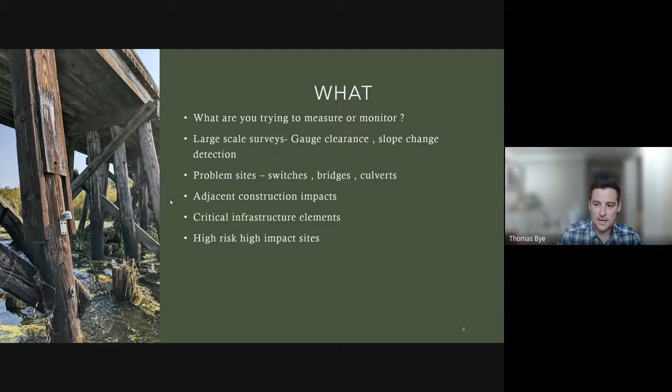As we talked about before, at your larger scale, we tend to find you collect data in stages. Large scale gauge clearance, LiDAR scans of entire routes, slope change detection. So that would be flying a slope alongside a railway, an embankment, a retaining wall. You fly that maybe once a year, once a quarter, monthly, depending on your risk and your movement levels. And then you start to narrow down where your problem really is. As a business, we would obviously love if everyone sensored every bridge, every culvert, every structure. Not going to happen. We know that's not going to happen. So we look at collecting data across, say, a kilometer, 2 kilometers, saying, hey, your problem areas are here, here, and here. Maybe we should go and sensor those locations if they're particularly high risk.

Typically, we find the biggest headaches for operations revolve around switches, automatic switches that go into fault mode, or won't throw automatically from the control center. Typically, that's associated, we find, with that dynamic voiding. They start voiding and need tamping or need ballast packing. That voiding gets worse. Then as the voiding happens, the geometry changes, the switch blade can't close properly, then you get a switch in fault. You have to send someone out. By monitoring the switches, we're able to start to inform, hey, these are starting to void more than the others. Maybe that needs attention first, and build up that asset management plan.

Bridges, as you can see, I appreciate a lot of the audience here is in the LRT, light transit area, where hopefully a lot of your bridges don't look like that one on the left.

But for the Class Ones and the freight railways, they have a lot of legacy structures, a lot of legacy culverts that I think, if people were honest, could probably do with quite a lot of maintenance, but being able to keep an eye on them, to see what's moving, to see what's failing before it really fails is key.

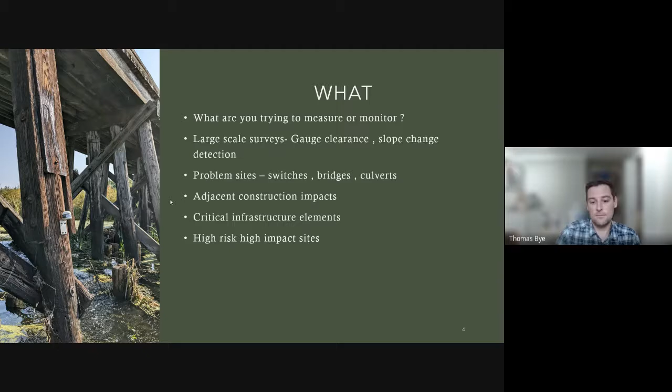And as we touched on before, adjacent construction impacts. If you've got someone doing, say, line side piling or line side retaining walls, you're most worried about cross level and twist. That's ultimately what would put your train off the track. If you're going underneath, you're maybe worried about settlement or consolidation of the ballast, or voids opening up underneath. So yeah, that's kind of what we typically measure.

How? Again, we like to think that we can replace or supplement a lot of the skilled human eye, but ultimately for that final decision on the rail, you can't beat someone going out and doing that final inspection to make that judgment call on what the data is telling us and how this is going to affect the safety of our operations. So there's still definitely a place for the skilled human eye, but they can't be everywhere all the time.

And as the title says, our slogan is keeping boots off the ballast. It's fundamentally safer to not be on track than it is to be on track. I know there are various ways we can put protection in, we can put closed lines in, we can turn all the power off. But if you're not there, you can't get hit by the train, you can't trip over the rail, you can't have an accident on the site. So by installing sensors on the track, these provide that real-time data as if someone was there to help inform where to target and where to view.

Particularly relevant for track geometry faults, cross-level, twist, where you would typically have to go out either with your survey bar or a track trolley, or maybe set up a total station to do the monitoring. This is on track for maybe an hour to do the setup. It's then calibrated and set up, and it just pushes the data out every 10 minutes, every 15 minutes, every 5 minutes, whatever the client needs, without that human being in the danger zone.

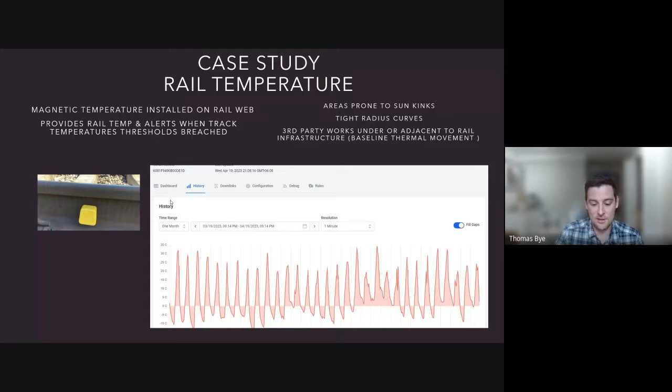And we obviously work with clients on whether it's ballasted track, your sleeper spacing, your tie spacing, direct fixation track, transitions between slab track and ballasted track, and how they're all moving around in the heat. So yeah, basic example, how hot is it? More complex example, start to build up that true picture of how your infrastructure reacts in the heat, and then how you can change the design going forward.

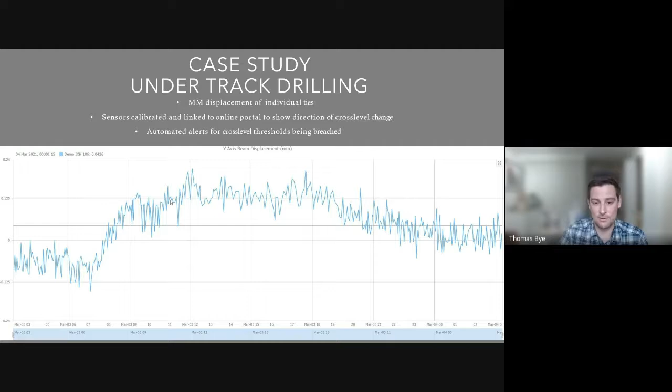Here is an example of an under track drilling job. This is millimeter cross level change in a tie. You see very small data movement here, but this effectively over a course of a few days shows that cross level changing in real time. That level of movement is almost guaranteed to just be linked to thermal.

That's then used, this is through the Senceive system that we use with those guys. They've come up with a very good system there to calculate if it pitches up, you're heaving. If you're pitching down, obviously your track's coming down. So we know the length, we know what each sensor's done in that pitch and dip, and we give a daily settlement profile. If anyone's interested in the details behind that and how it compares to traditional survey, total station survey, etc., there's been lots of testing on it. The quick summary is that is a very useful daily trend to see if you have a problem with heave or settlement.

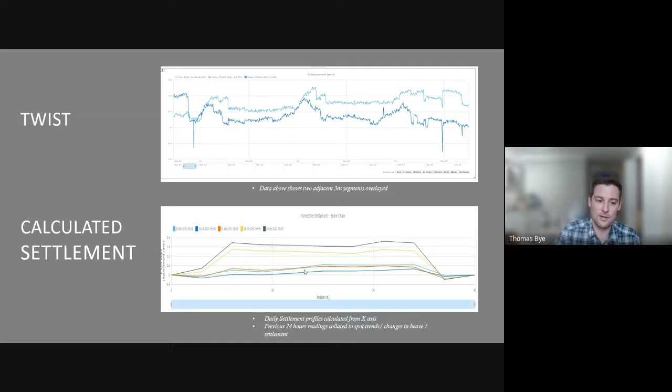And as I'm sure you can probably guess, the site that had no work done moved a lot. This was up in northern Alberta, where you do get a big freeze. These sites with the geogrid and the drainage drained quicker. You could actually see which side of the embankment it was draining to and from. And you can even see when it rained, because you've got a drop in rail temperature and then a few minutes later a spike in soil moisture. So yeah, that's the kind of more detailed side.

And then a more simplistic approach, we can do line side flooding, we can do culvert depth, flow rate. Again, it automates depth of water, flow rates, temperature.

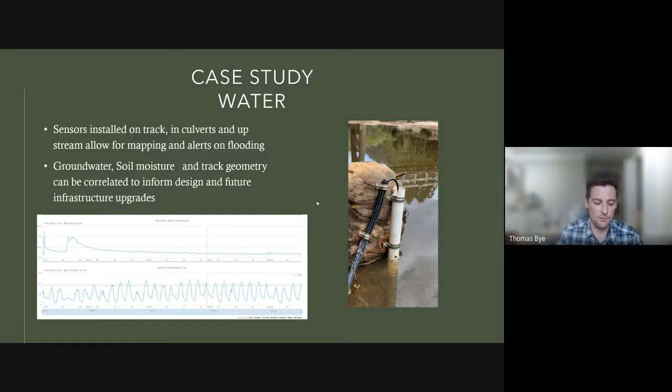Temperature is interesting with water. You can tell if it's rained or if it's meltwater in the mountains. Again, all linked into one single portal. So if you're worried about whether water depth is affecting structure movement, you can tie the two together.

This is the camera integration. As I said, not too many light rail networks run through terrain like this, but essentially, to put it very crudely, there's a glacier at the top of that picture on the left there. If all of those rocks come down that channel and knock over a grid of sensors, which you can see a few there, there's a few more behind us, and a few more further up the channel, those fall over, that camera takes a picture.

The railway operator can then basically make a judgment call as to whether the line is clear or whether they've got a big problem with rocks on the line. That's something that we are seeing more and more interest in, especially in the mountain terrain for the Class 1s.

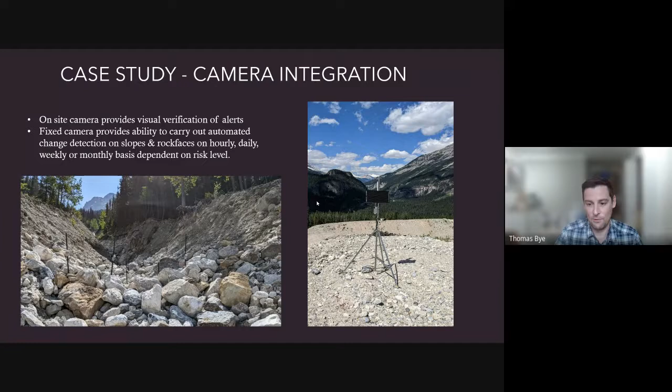Again, another way of using AI and software, and hopefully this plays, is OCS monitoring. So very different from what we had before. This is a system that uses a fixed camera on top of a train and picks up your basic and fundamental OCS parameters. So we have height, stagger, and arcing, and obviously speed. And then from that, it calculates a pantograph to wire force.

We know there's various ways of doing this, and there's lots of people in the industry doing some really good work on this. This system, where we've decided to partner up with a company called Incremental, a UK-based company, is very much designed to be a super easy, low-cost way of doing regular checks. The more times you collect this data, the more information you put in the system, the better your feedback is.

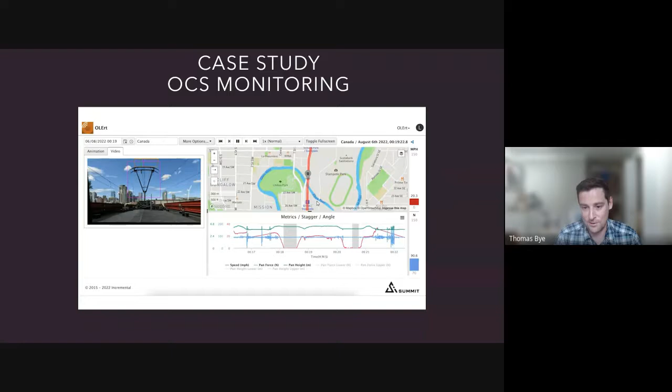So in this example, that data is actually collected with a GoPro that was braced to remain still. So you don't need the $100,000 camera, and you certainly don't need to be modifying train wiring. The idea is it's a very easy, simple, quick way to collect regular data on your OCS network to pinpoint faults, whether you've got too much stagger, whether your height's dropping, or whether you've got arcing problems. So that's the on-track or on-train sensor data.

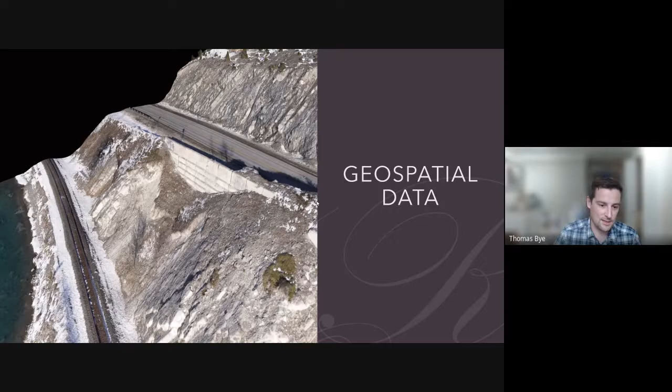Very quickly, conscious of time with everyone as well, and some questions. The geospatial piece is the bigger picture as to how you collect data to potentially inform design decisions or narrow down problem sites. I won't go through all of this, but LiDAR is obviously a big buzzword in the industry. I say buzzword, it's been around a while, it's very popular. Certainly has its place. We'll share this presentation afterwards so you can read all the points. LiDAR is great if you have vegetation and have some money to spend, in our opinion. It's great for certain applications.

Where we've gone is more a photogrammetric survey, which still generates point clouds. We can get down to very high accuracy, 1 centimeter, by tying in control points and survey points. And most importantly, for a lot of clients, we can do it off track, and it's a lot cheaper. We collect the data from one of our fixed wing drones and fly the site. We're not on the railway, we don't need a line closure, but we can still generate point clouds. We still produce stuff that can be put into AutoCAD, which helps inform design decisions, and also things like cut and fill volumes: if there's been a washout, how much fill you need. This is also what we use to create renders and images like this.

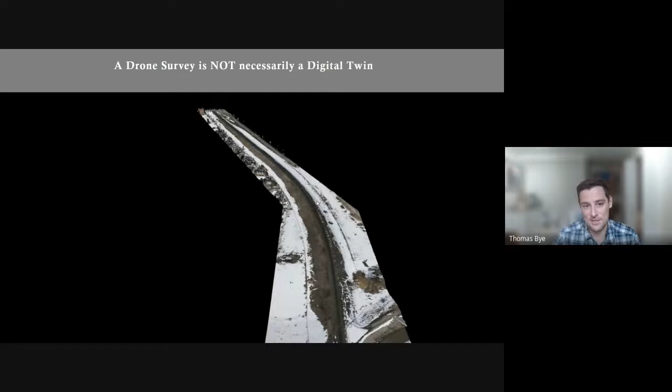So what we would like to say is a drone survey is not necessarily a digital twin. We see lots of people that get a drone survey done and say, hey, look at this, this is a really nice render, it's a digital twin.

Which of course has just frozen on me, right in the middle of the presentation. Apologies for this. It worked fine yesterday. I'll keep talking.

Just because you've got a nice picture doesn't make it a digital twin. In our opinion, a digital twin is something that needs to be updated regularly, needs high resolution, high accuracy data, and ideally needs to pull in sensor data or real-time information to replicate what's going on on the network in real time, but digitally on your computer.

Apologies, Andrea. I don't know if you...

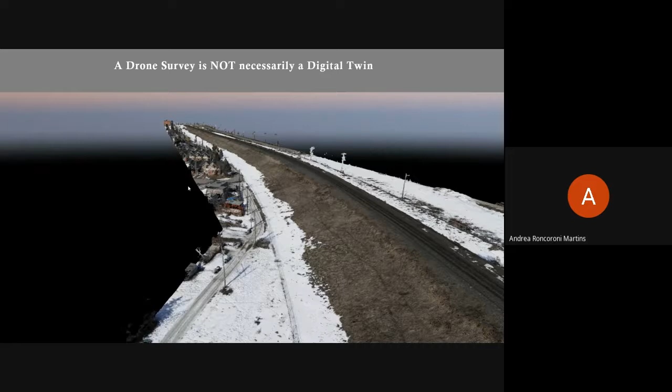I have completely frozen, which is always good when we're trying to do a presentation on technology. Don't worry about the video. Maybe you can come back to that if it works later. Let's continue with the next slide, or maybe you can explain what you wanted to explain. Yeah, sorry, I'm trying to. My PowerPoint has completely frozen, so I can't skip to the next slide either.

But whilst I try and unfreeze this, my next slide talked about how we automate change detection from this data. So what we would do with this data is we overfly the site once, and that generates what's called a digital surface model. That gives you a very accurate, effectively 3D terrain map. We then overfly the same site again using our fixed reference points, and the difference between the two,

if you have a rock that's moved, you have an embankment that's sunk or slipped, if you have a structure that's moved, we kind of cap this at like a 10 centimeter level of change in order to ensure that we're giving the right data. But you can imagine, embankments and things like that, if it's moved more than 10 centimeters, we can pick that up and automate that change.

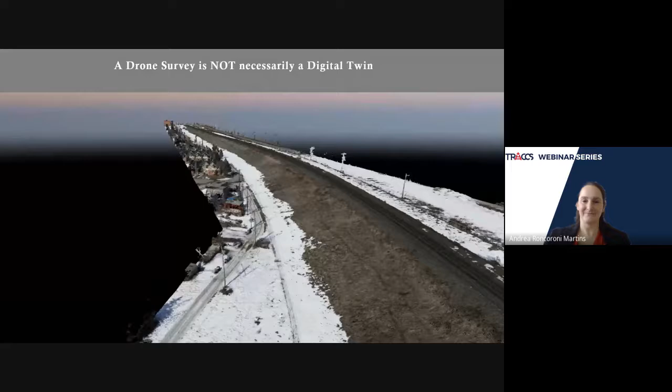I do apologize. I am really struggling here. Hopefully this is not going to cause a massive problem. No problem. Maybe we can allow the audience to think about questions from the previous part. Yeah, if anyone has any questions, good idea. Send me the presentation and I'll see if I can make it work, okay? It's okay. I think it's just my computer here has run out of... Do apologise for this, everyone. Does anyone have any questions whilst I'm...? We have a quiet audience today. Okay, there's someone's hand up. Go ahead, Bash. You can unmute yourself, Bash, and ask your question. Okay. Oh, I think I am back. Can everyone see this one again? Yes, we can. There we go.

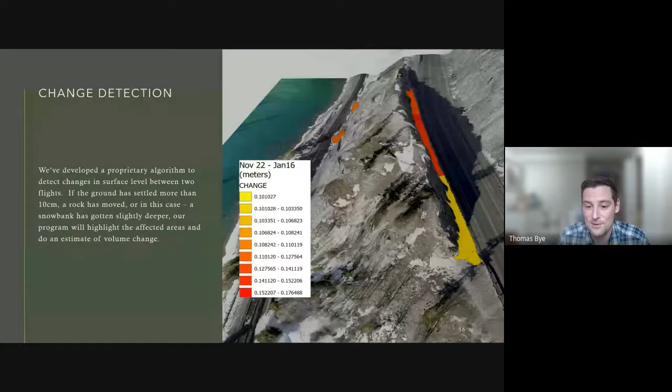Sorry about that, everyone. So yeah, change detection basically takes the digital surface models, as I said, and highlights areas that have moved and tells you automatically how much they've moved. One that may be more interest to the light rail market is you can use a similar technique. This is a proprietary tool that we've developed. You effectively take the height of a tree next to the railway and you can map out where it would land if it was to fall over.

Then you categorize them all at a risk level. Will it clash with the railway? Will it not? Will it clear? And that maps that out to save the trees that don't need to be cut down and also make sure the vegetation management budget goes a lot further.

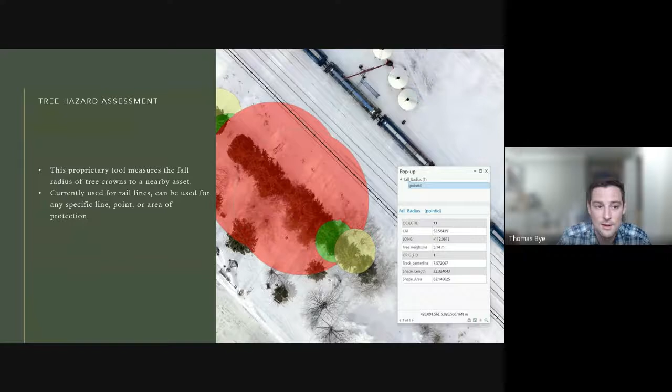And then the bit that I think is really useful, just to finish off here before we get hopefully to some questions, is data on its own is really useful. It helps inform decisions in real time. It increases the safety of people working on the track. It just gives you that bigger picture of what's going on. Data over long term is even better. You can start to see how your infrastructure is dealing with the heat, dealing with the cold.

Data that's then combined with machine learning and AI is potentially a really powerful tool, I think, in this industry. And if we can collaborate on data, which I know is a challenge, we as a business must have collected millions of data points now on rail temperature, cross level, twist, dynamic voiding, weather, soil moisture content, all the rest of it. And there are definitely trends and information in that data that would be great to be used to inform new construction and new design.

Maybe the tie spacing, if we took all the data points from tie spacing that was at 400 mil compared to 600 or 500 mil, which is more stable, which lasts better in terms of long-term maintenance, and then start to look at these trends and use machine learning and AI to really understand what works well, or simulate, as the temperatures seem to be getting hotter in the summer or ice storms seem to be getting more severe. Okay, if we suddenly get a 40-degree drop in temperature overnight, well, that's a bit extreme maybe, or we get to 45-degree plus, what track structure reacts how and what will that do?

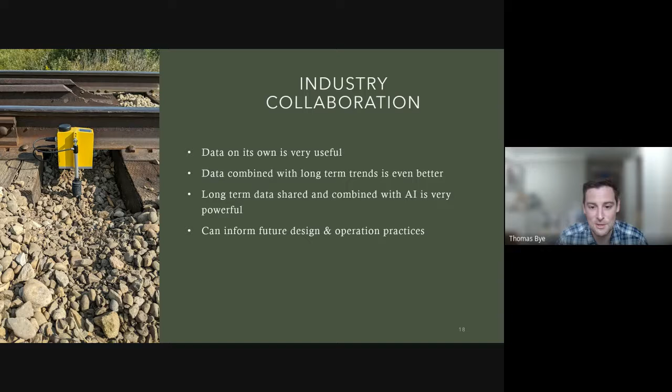Now, appreciate that's something that's not going to be solved in an hour-long presentation, but I think there's potential there to do things like that with the data. Same with OCS: different designs, different tensioning systems, different pole types, what works well, what doesn't work well, in different weather, in different designs, etc.